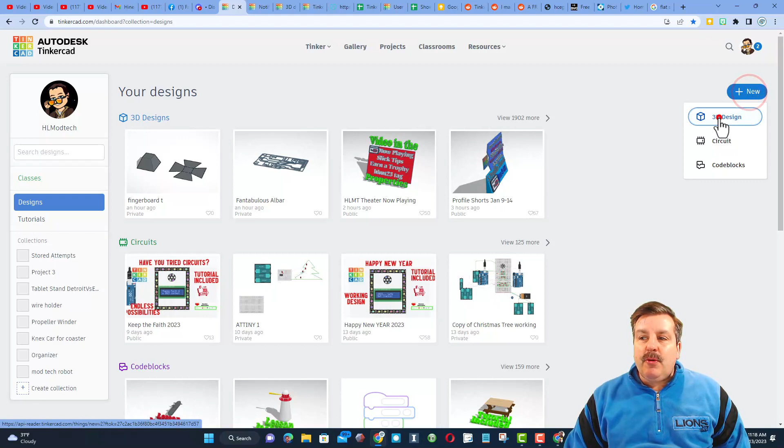Let's get cracking. Step one is to visit Tinkercad. I'm going to hit new and do a 3D design. Whenever I load them, I like to name them so I don't lose track. This is going to be called a trapezoid for a fingerboard, so I'll put 'trap fingerboard.' Step one is search, and we're going to type trap.

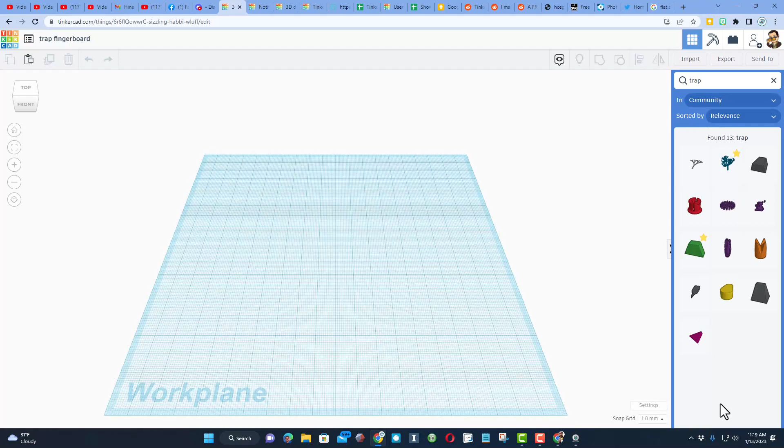When you type trap, it'll bring up all the trapezoids. We want a special one called the double trapezoid. I'm teaching you all these steps so you can make them your own custom size. I'm going to make it 10 centimeters on the bottom, 5 centimeters on the top.

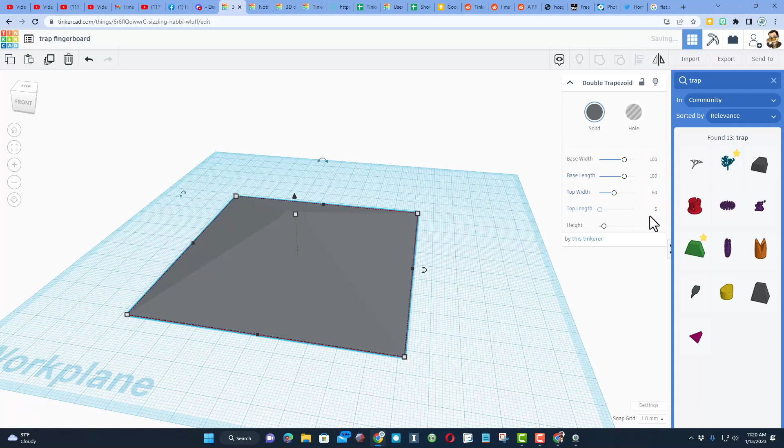To do this, I'll go to base width and type 100 for the number of millimeters. I'm going to do 60 for the top, I think I decided, and then make this 60 high. Now wait for it to render, and if you have a glitch, like if it doesn't get to the right size, go back and fix it. Instead of 60, I'm going to make this 50 just so it's got a different shape.

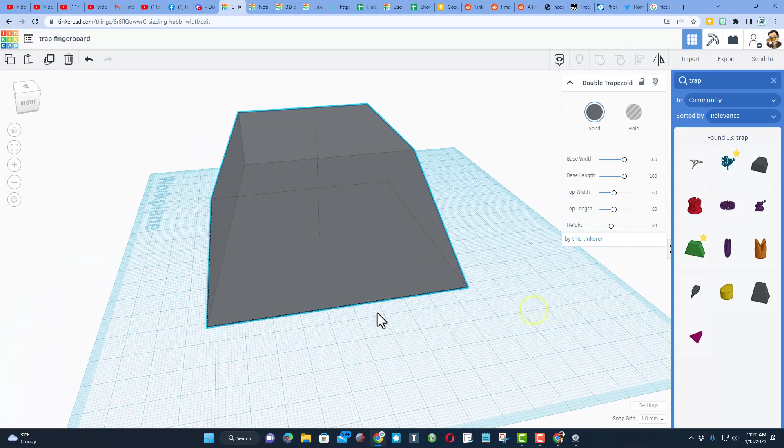Now the trick we're going to use here is a cut. I want this shape to be my final project, and I want one of these sides made right now. Are you ready for this? We're going to hit work plane and connect it to the side. I'll spin so we're looking at it. Bingo, I want to slice off a sliver of that for laser cutting.

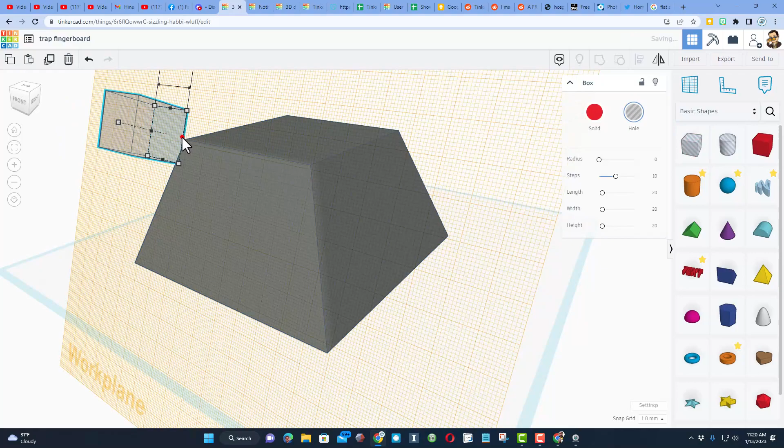So we're just going to bring out a cube and make it huge, stretching it all the way down past in every direction. See how it's bigger? Because this is pretty large, I'm going to change this number to 120 -- you can fiddle with these. Then I'm going to just grab the handle and push it through. I'm trying to get a 4 millimeter sliver. That's pretty darn close -- as you can see, it cuts all the way through.

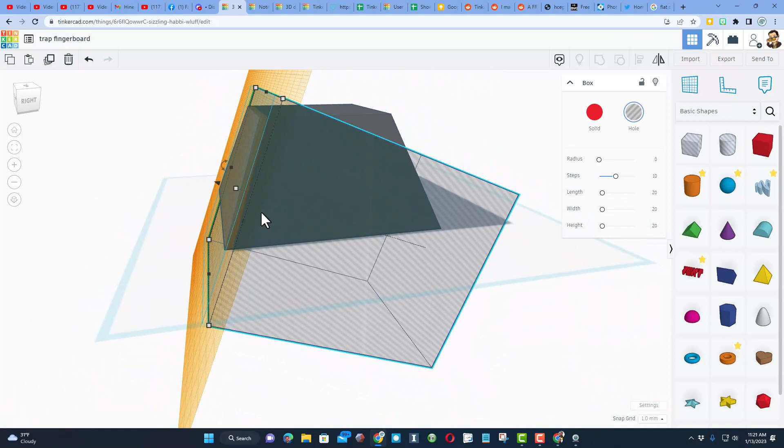It does not cut through on this side, so I'm going to fix that. Work plane -- because I put the work plane there, now when I click on this cube I can stretch it out. Put the work plane back on the ground so you can see it's totally going to cut. When we do Control G, that is the part we're going to build with.

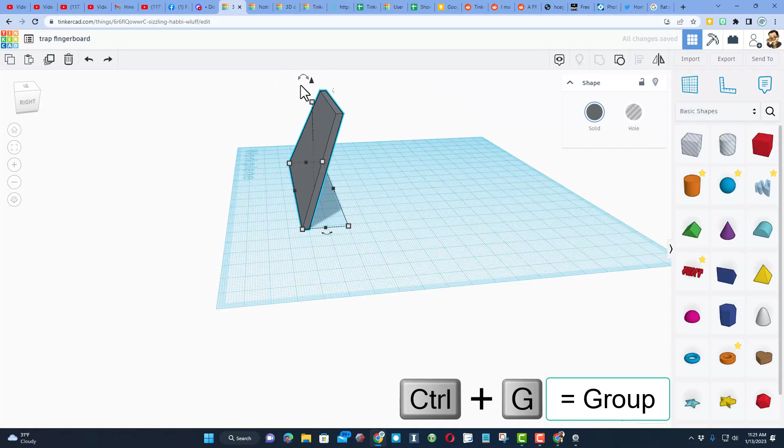Now we need to lay this flat. I'll zoom in so you can see it a little better. Grab that rotation handle, and just go to 67.5 -- that's pretty close. If you go a couple more degrees you might get it more perfect, 68. If I do D to drop, let's see how flat that is. It's not bad, it's going to work for what we're going to do.

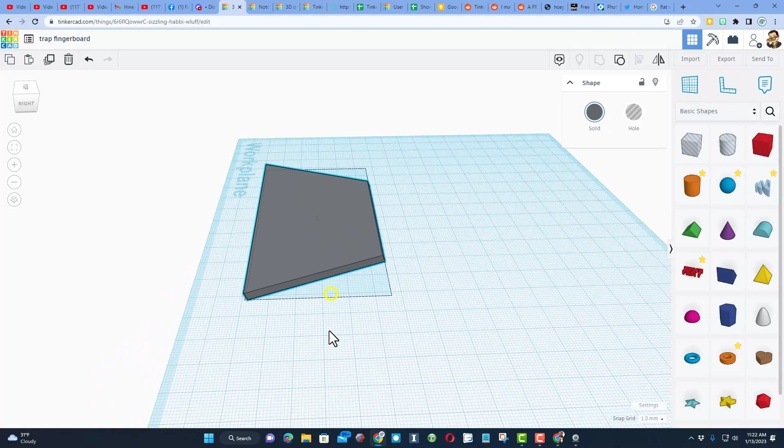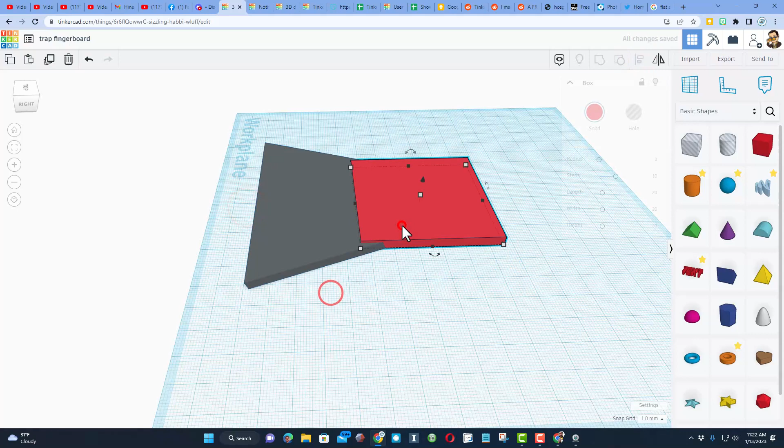We know that we did 60 by 60, so bring out a cube. I'm going to resize that by holding shift and stretching -- let's type 60 and press enter. We know since we're laser cutting, we want to make it 4 millimeters high. And then watch this, it'll line up exactly with this shape. See how that just naturally fits? That's what makes this all possible.

We're going to click on this and do Control D, shift nudge to the other side, click on the flip tool or the mirror tool, and nudge it to where it goes. Bingo, it'll be just like that. We're going to do shift select, so we've grabbed those two, Control D, and we need to rotate it 90 degrees.

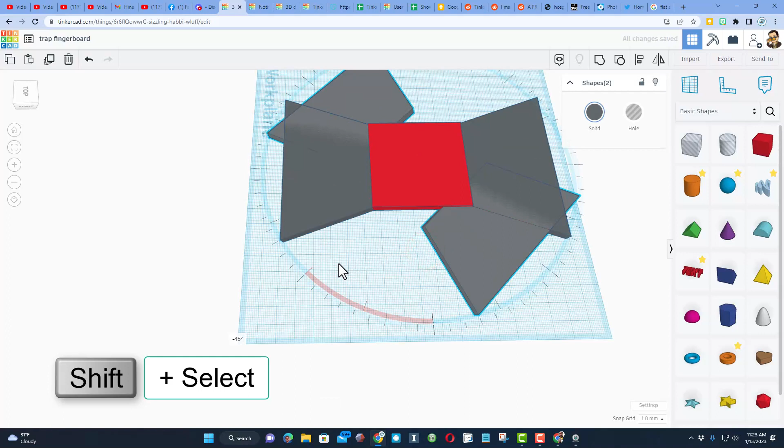Remember, if you stay inside, it snaps to those lines. If you come out, it goes 1 degree at a time. Bingo, you've got your ramp lined up. Select them all, do Control G, and group it. Now notice there are little seams here. We are going to get rid of those in a minute. I'll show you how then.

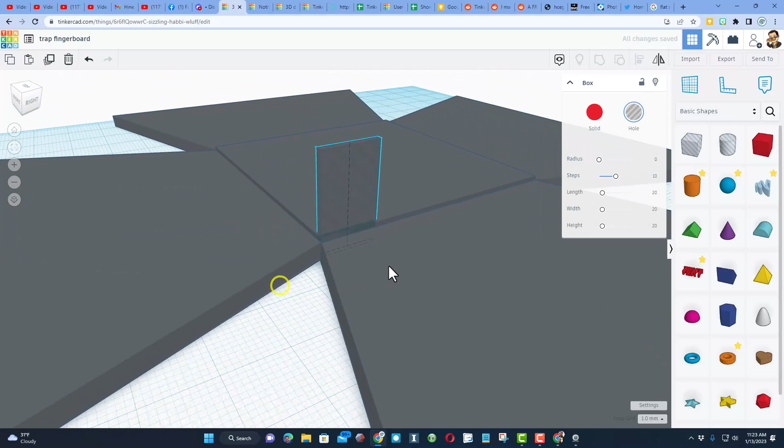First though, we are going to make this so it can fold. Bring out a cube. I need you to type 12, and I need you to type 1, and then I need you to put it right in that seam. If we zoom in there, you can do F to fit view. You can see that's lined up pretty good. I'm going to do my nudge at 0.5. So I'm going to move it right on the middle of the seam.

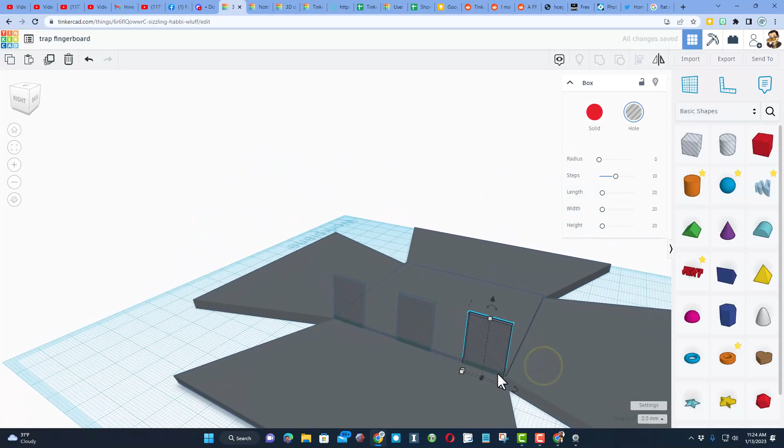And let's do Control D, shift nudge, get it to the middle, and Control D, and we're going to use this to nudge back. You do want to make sure you get to the edge, and then watch this trick for making these split perfect. Shift select group. And now if I shift select the middle, we can do align. And if we choose middle, it nudges that where it needs to go. I'm going to ungroup those again, just because they didn't need to be grouped.

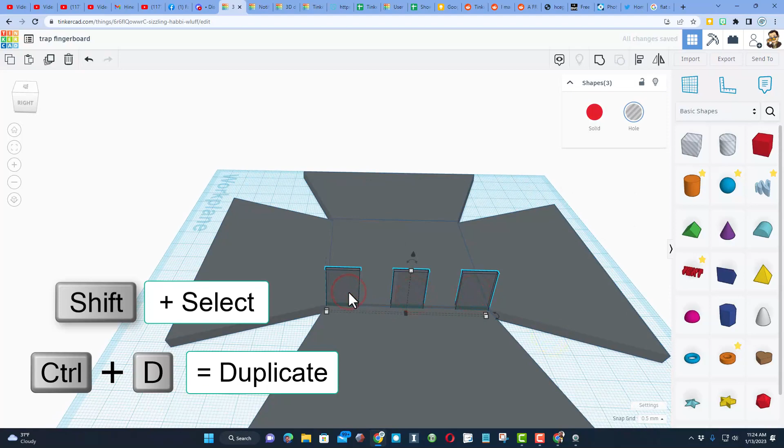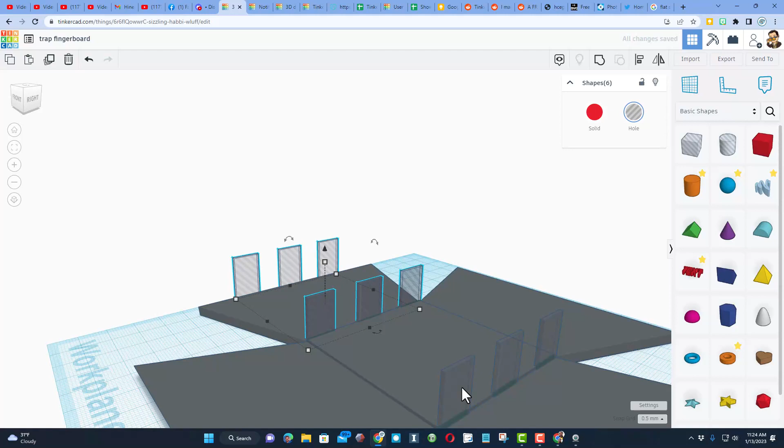Shift select, Control D, shift nudge all the way across. Let's make sure those are lined up. I can do F to fit view to zoom in. That looks really, really good. And then, friends, are you ready for this? I'm at an angle. Those 3 are selected. Shift select for 4, 5, and 6. Control D. I didn't want it to move, so I'm going to delete those. Let's shift select again. 1, 2, 3, 4, 5, 6. Now do Control D, and all we need to do is rotate 90 degrees, and we have got our shape.

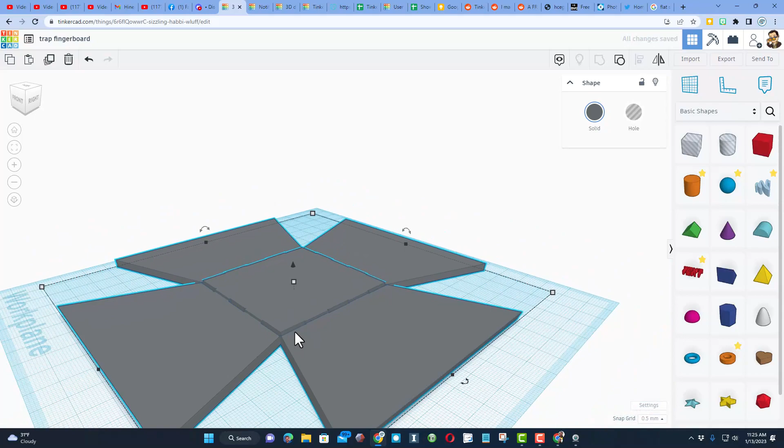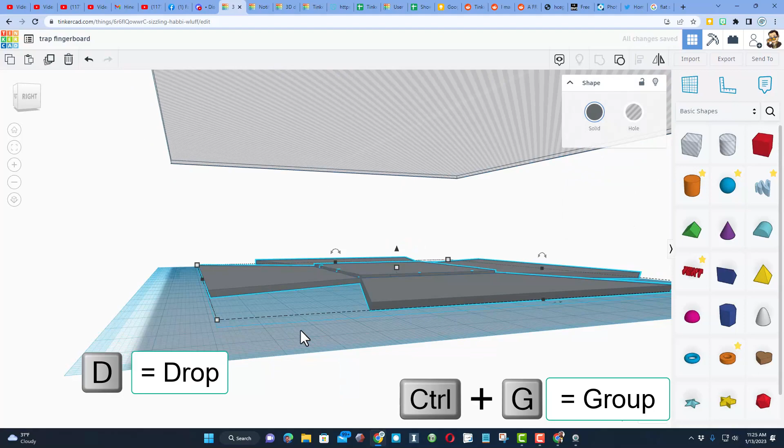Select them all, Control G to group, and now we need to fix these little slices and edges that aren't perfect. Friends, are you ready? Here we go. Bring out a cube. Go past the shape, stretch it all the way so it goes back. I want you to type 1.5 right here. That's going to be the level that we cut at. Let's do Control D on this piece, and let's bring it up in the air. Grab those 2 and do Control G, and do D to drop. And if you look underneath, that's a nice smooth cut.

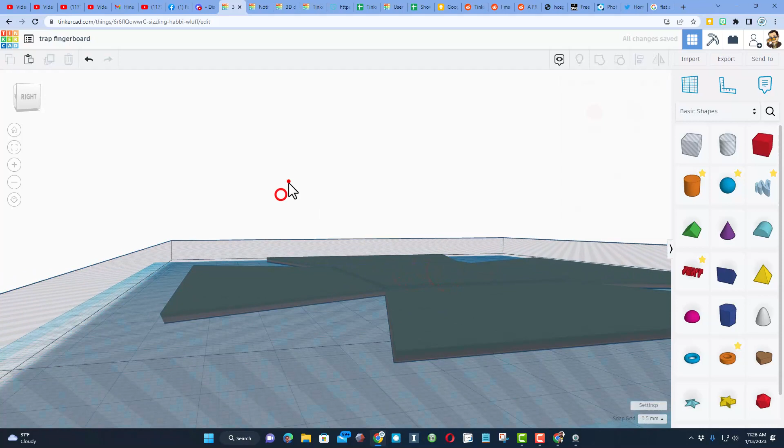Now we can bring this one down, and we're going to do D to drop. We want to do Control up, and we can do 1 or 2 because that would be a total of 1 millimeter. We do want to make sure it pokes all the way through, so I'm going to lift this up a little higher. And let's group those. Control G, and check it out. You have got a nifty project with all these edges cut and ready to bend when we're done laser cutting.

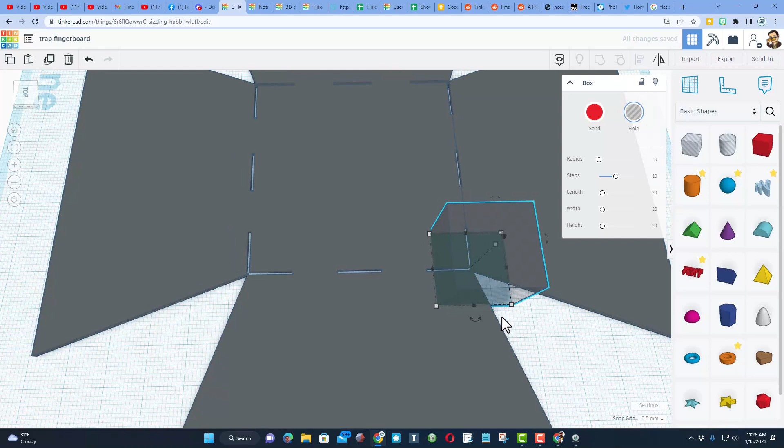Now, if you want these corners gone, which I do, I'm going to just fix this manually. So I'm going to bring out a cube. I'm going to shift squeeze it down to about 1 by 1. Let's nudge it into that place. F to fit view. Zoom back just a tiny bit. And I can nudge this over just like that. So that's going to be perfect.

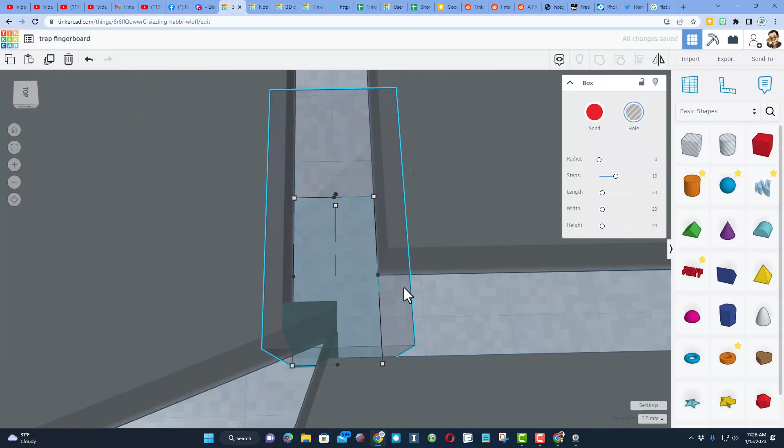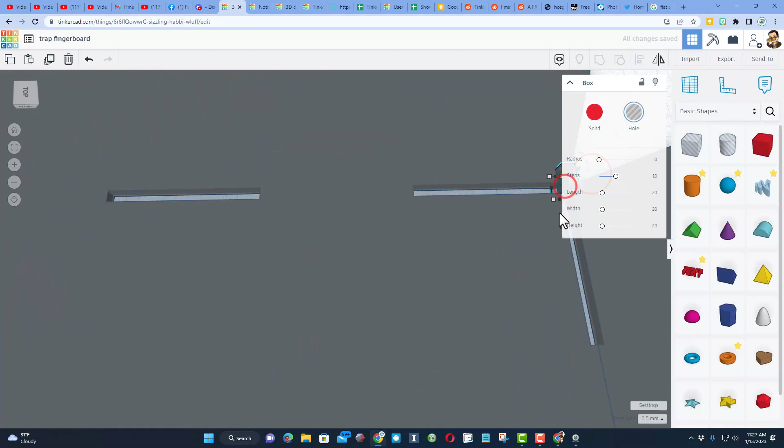Control D, shift nudge to the other side. Once I get close, F to fit view. Bingo, had it. So let's do shift select to grab those 2. Control D, didn't want the move, which it memorizes. That's handy sometimes. Control D without the move, shift nudge to the other side. Let's do F to fit view and see how we did on that. That was too many clicks, so I'm going to come back a click. This is in my way, so I'll just hide it.

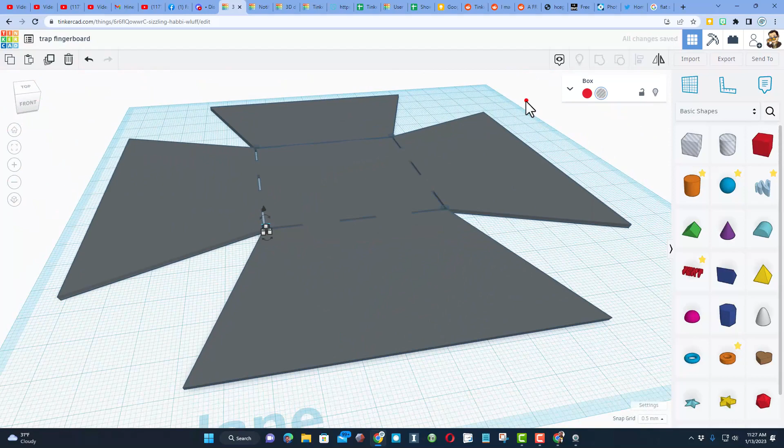That's going to be groovy. Right click drag so I can see the other side. One click back. That is going to be groovy. Back out, grab all 5 pieces, group them one more time. And friends, we're ready to send our trapezoid fingerboard to the laser cutter.

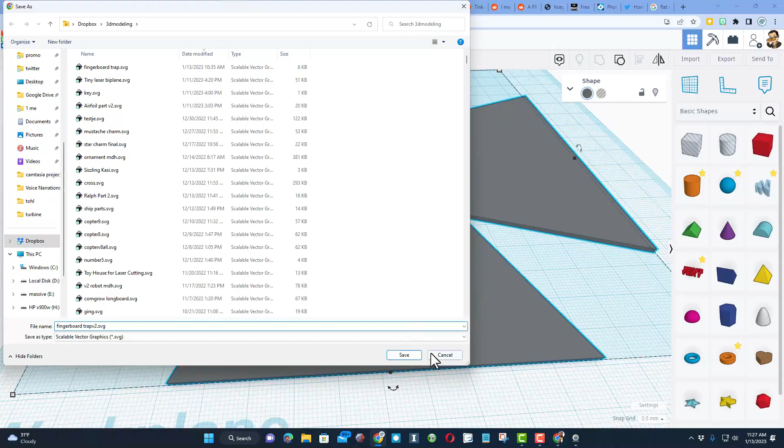Hit export, choose SVG. I'm going to put it in my 3D modeling folder, and this one's going to be V2. I already made one just to prove the concept. Alrighty friends, we are using LightBurn, and I'm going to bring in that project. We need to click import, and like I showed you a moment ago, it's in my 3D modeling, and I called it Fingerboard Trap V2.

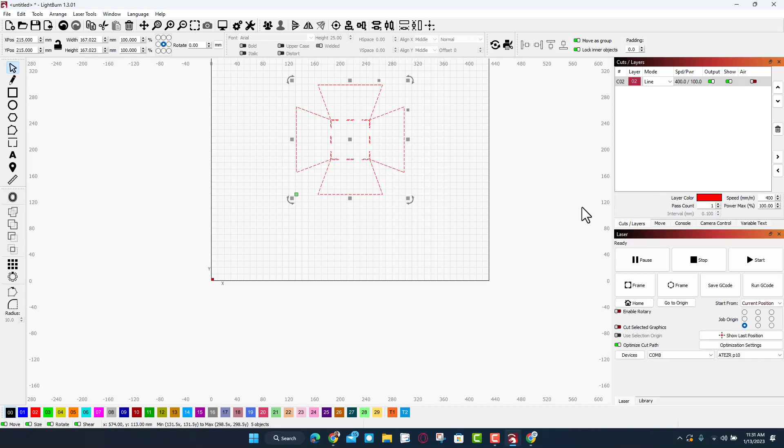When you bring it in, you can see how it's going to cut all those little edges for us, and then we are actually going to be able to bend and fold those down. If we check our cuts and layers, I'm going to do 400 speed, 1 pass, and a power of 100. I'm going to be working with 4mm cardboard, and I've tested those speeds, and they work pretty darn well.

Alrighty friends, so there is my 4mm piece of cardboard. Let's use the move command to get the laser out to it. I am going to loosen it. We'll flip down that kickstand quick, and we'll get our height. Move my cardboard so it fits. That is going to be great. Tighten it back up. Once again, love that there is a single nut. Love that there is a kickstand. It is so darn slick.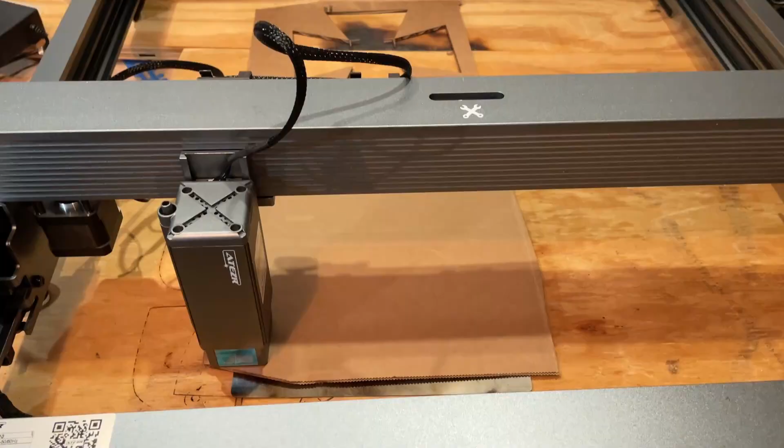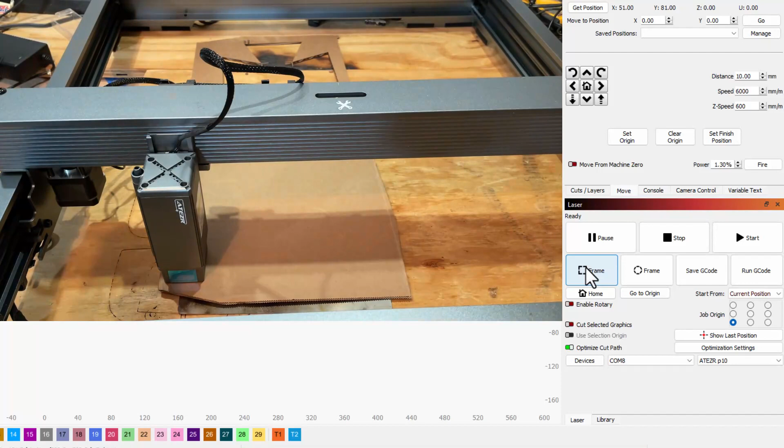Just a quick reminder, friends, you'll note this is all in the open air, but I do cheat. I have a sweet range hood that's venting outside. Put that in to give me better lighting, and it lets me give you a better view as we watch these cuts. Alright, so let's nudge this out into place. Let's hit frame and see how she's going to fit. Right there, you're getting a good clue as to why I chose the measurements I did. And friends, time to put on some safety glasses and make something magical.

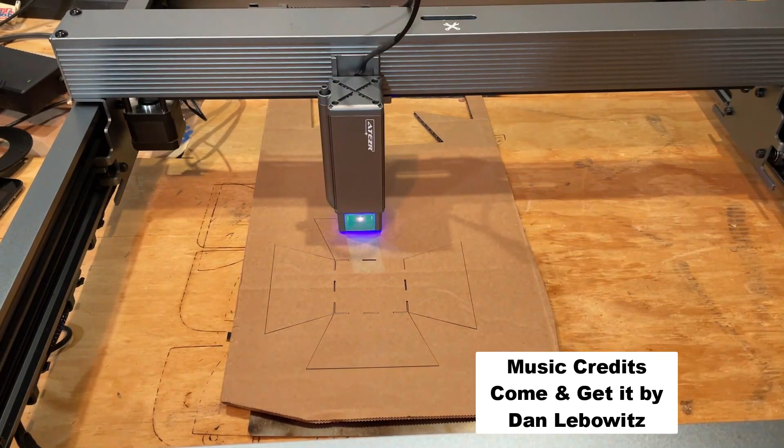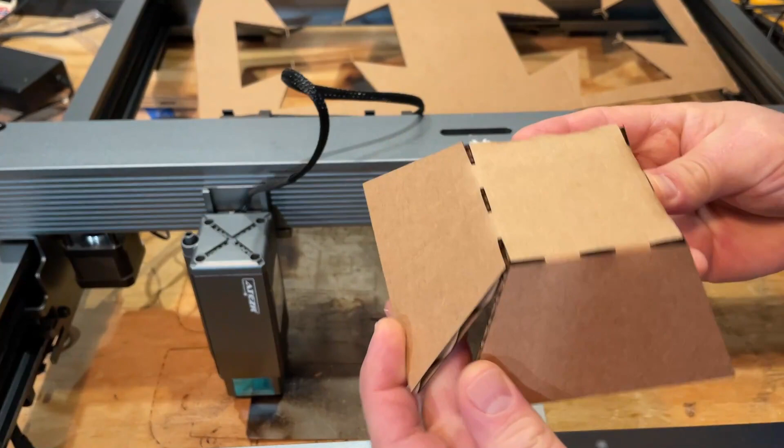Alrighty friends, so I'm going to power this off, just make it a little quieter. I already shut off my fan. Check that out, buttery smooth cuts. And are you ready for this? Because of those seams, we can just bend it down and it already is the skateboard ramp. It's that simple.

Now you could cut a base for this that was larger. You could cut it so it fit exactly. That depends on how you want your park to be. Once again, that would just be a rectangle and boom, you'd be ready to go. Now friends, I intentionally chose this size because I knew it would fit my cardboard. If you've got larger cardboard and a bigger area, you could make these any size you wanted.

Alright everybody, so as I wrap up, I want to say thanks again to Mrs. Dweck for reaching out. This is a fantastic idea. I love doing these little grooved parts. It's been on my list. I haven't done one in a long time. It's nice to actually have a project where you're making one piece that folds and does what you want.